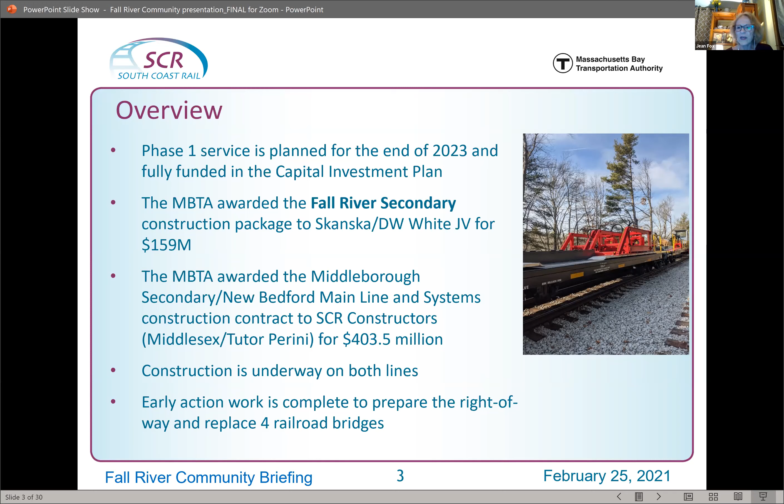Construction is underway on both lines and will be ramping up even more very shortly as we see spring approaching. We've done a lot of early action work in advance of this, which includes 46 culverts and a number of railroad bridges. We ordered special track. We've done some demolition, which you in Fall River also witnessed. So we've been very, very busy. Next slide, please.

So the stations and layovers are for Fall River. We have the Weaver's Cove layover, and we also have the station, the Fall River Depot. And then not far over the line is the Freetown station in Assonet. Weaver's Cove and the depot are 1.5 miles apart, and the Freetown station and the Fall River Depot station are 5.7 miles apart. So we're not talking a huge geographical area.

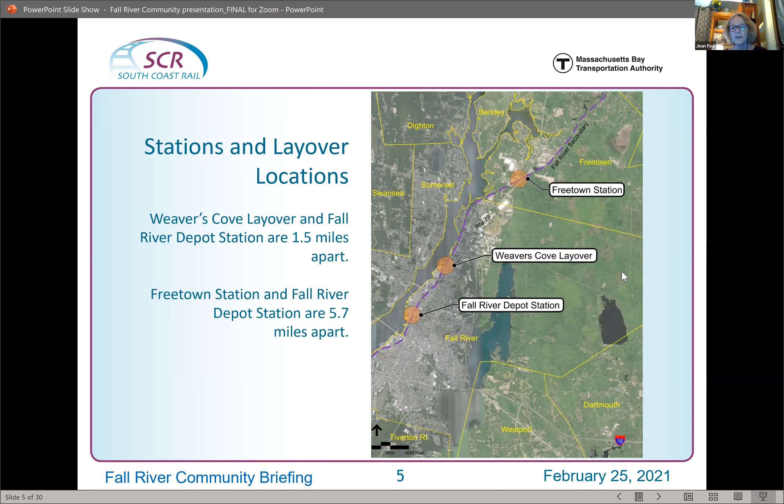Next slide, please. So in Fall River, the locations of these stations vis-a-vis everything else, you'll see we've got a number of bridges, including the Farm Road Bridge, Collins Street, Ashley, and Weaver's Cove layover there. And then at the bottom, Pearce Street Bridge and the Fall River Depot station. And then south of that, Turner Street Bridge.

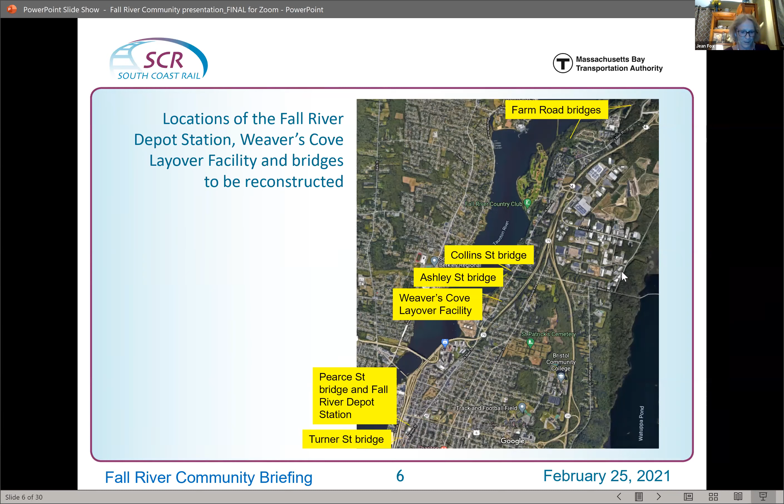Next slide, please. So what's included in this package? We have 12.1 miles of track, 2 new stations, the Freetown one and the Fall River Depot, and the layover facility at Weaver's Cove. We also have 10 grade crossings, but none in Fall River. We have 8 bridges and 10 culverts. Next slide, please.

So I'm going to pass it on to my colleague, Mike Fitzgerald, who's going to give you more details on construction startup. Good evening, thank you, Jean, for that nice introduction. My name is Mike Fitzgerald. I am the Deputy Program Manager for South Coast Rail. I'm going to give you an update on where we are with construction at this moment, and also where we're going to be going over the next few months.

Currently, we are doing survey work along the right-of-way. We've identified some encroachments on MBTA property, such as fences, landscaping, and some sheds. The abutters have been notified of those encroachments, and we've been working with them all along to remedy those. Recently, we sent out notices to the abutters to let them know of the active work going on along the right-of-way, which includes clearing and grubbing of plantings and trees.

We published those notifications in the local newspapers, Fall River and New Bedford, and also the Taunton Gazette. As always, our South Coast Rail team is available for questions and willing to go on site to make visits if abutters have questions or concerns. And like this meeting tonight, we regularly hold monthly meetings with the city department leaders to keep them apprised of what we're doing out in Fall River. Next slide, please.

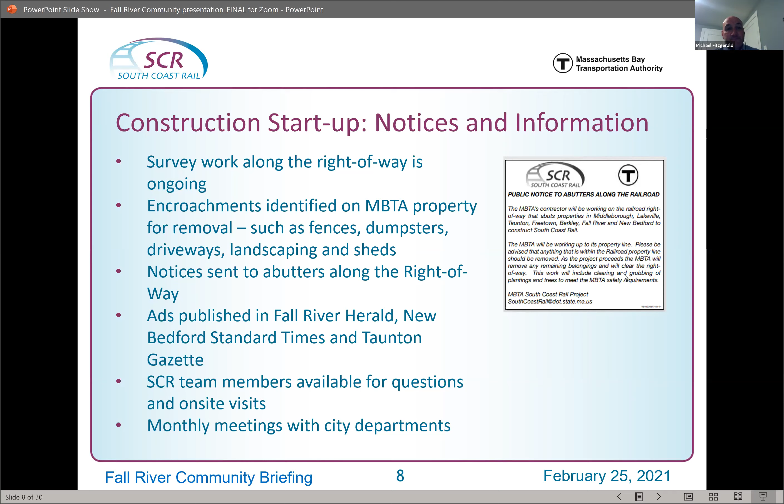I just want to give you a little update on what we're doing out there for construction. Our typical hours are 7 to 7. That'll start up actually next week with the sunlight. As we move towards spring, we get a little more daylight, and we're able to expand our hours to get this work done.

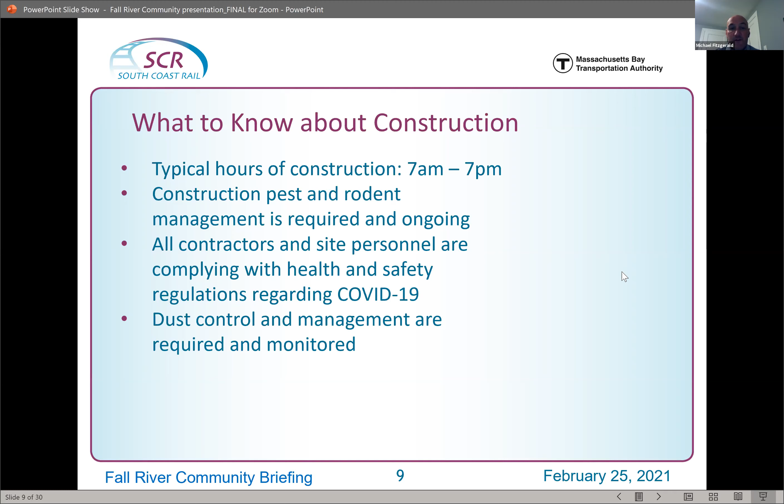Some of the work is construction and pest and rodent control, which is required and ongoing at multiple locations: the Fall River Depot station, Weaver's Cove, and also the Freetown station. Dust control and management are required, and our field staff and environmental inspectors consistently monitor that, making sure we and the contractor are following the requirements. Lastly, all of our contractors and site personnel are complying with health and safety regulations regarding COVID-19. Next slide, please.

This gives an idea of the work occurring, not shown on the screen, but to give you an update at Weaver's Cove, which is our layover facility in Fall River. We'll be doing earthwork, utility work, installation of water and sewer, and also some drainage piping. The pictures shown on this screen are at the Fall River Depot Station, where we're currently installing micropiles which will support the station foundation, located on the right-hand side. On the lower side is the building of a stormwater detention tank. Both of those locations are at the Fall River Depot Station. Next slide, please.

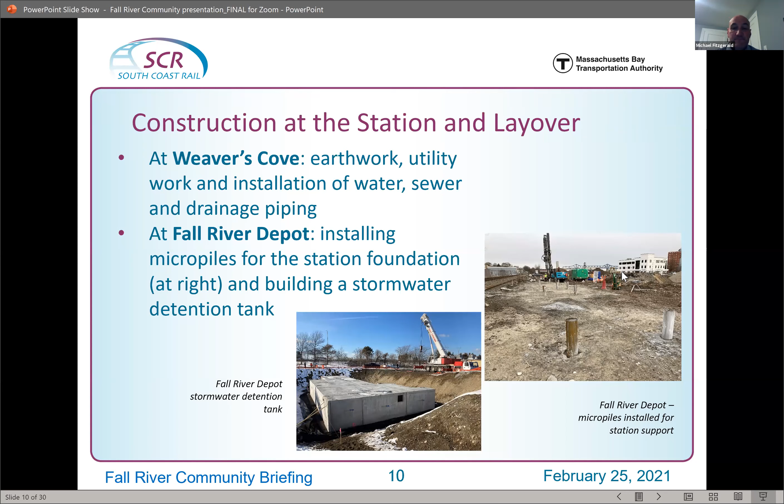Now, the next couple slides, I'm going to go through a few pictures. These are nice construction photos, so you can see the work that's ongoing.

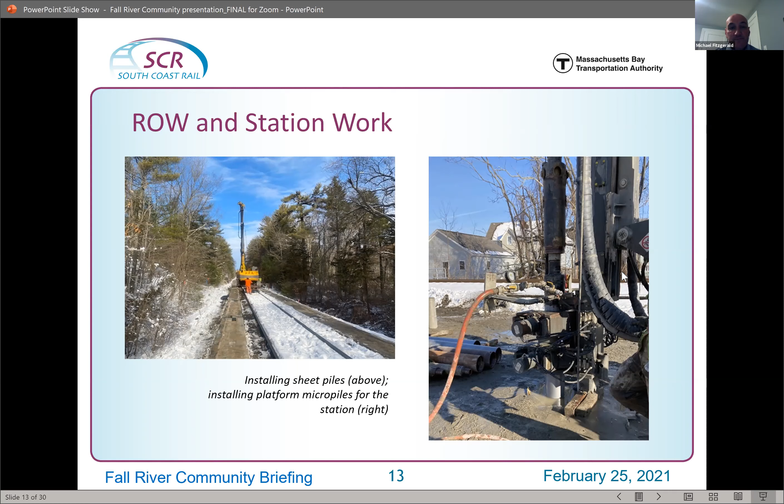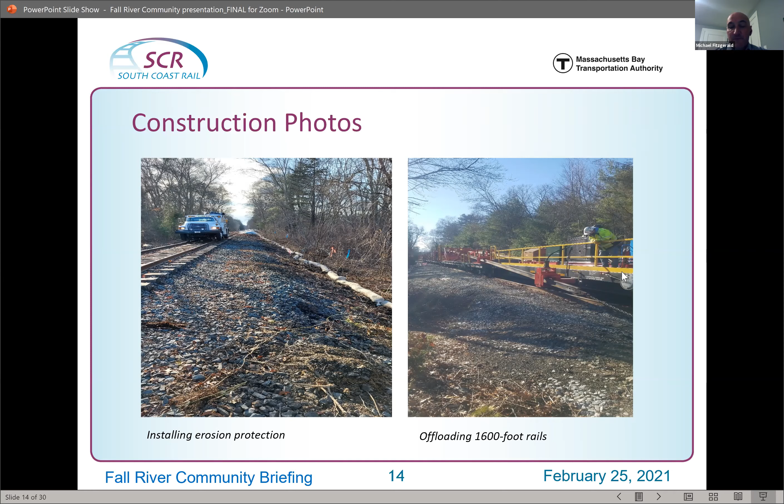I want to give you an update on traffic impacts you may see over the next year. Some short-term traffic impacts and lane shifts can be expected at Pearce Street around the Fall River Depot and Weaver's Cove location, and at the Farm Road Bridge, accessed via Horizon Way, where a culvert and bridge will be replaced. We'll also be doing reconstruction of the Pearce Street, Turner Street, and Collins Street bridges, which may require road closures and detours.

All of the above traffic management plans will be coordinated with the city prior to implementation. Also, you may see vehicles entering the right-of-way construction access at Terry Lane, and some short-term access at Cory Street and Alton Street.

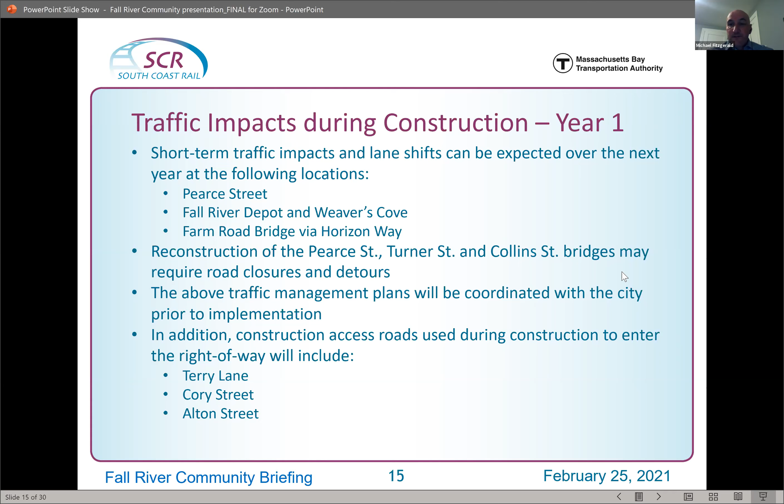So what's coming up in the next 2 months? Besides the work discussed, we'll be installing underground drainage structures, pipes and manholes, and relocating overhead power poles and lines at the Weaver's Cove Layover Facility. Down at Fall River Depot, we'll continue installing micropiles and pile caps for the station. Up at Freetown, we'll continue installing drill piles. Along the right-of-way, you'll see us constructing retaining walls adjacent to the track and installing sheet pile and drill piles, as well as continuing tree clearing, grubbing, and erosion control installation.

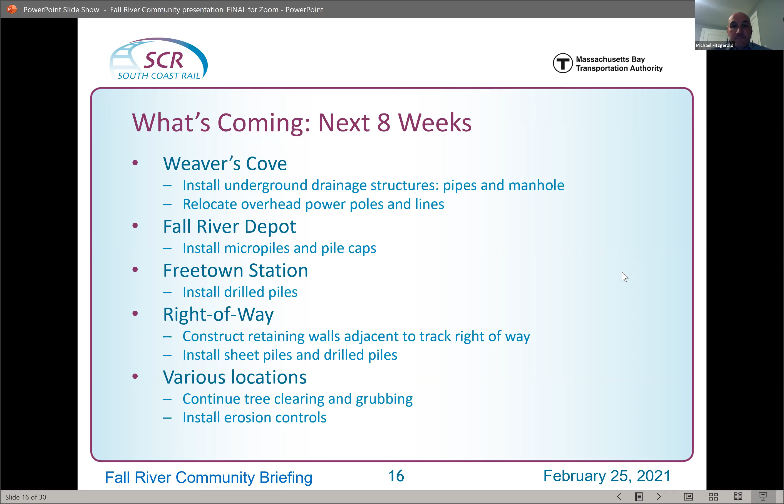I think I'm going to now turn it back over to Jean, and she'll continue the presentation from here.

Thanks, Mike. I wanted to give you a little more information on what you'll see at the depot station. It's located at Route 79 and Davol Street, right near where the old historic Fall River Station once lived.

It includes a 730-foot high-level side platform and 2 canopies, between Turner and Pearce. The high platform means you can get on or off the train from any car. It includes 220 vehicular parking places, 22 bicycle spaces, accessible parking, and electric vehicle charging spaces.

We also have a very clear accessible area for drop-off and pickup, and bus drop-off on North Main. It also features covered benches, fare validators, trash and recycling, and storage and utility areas.

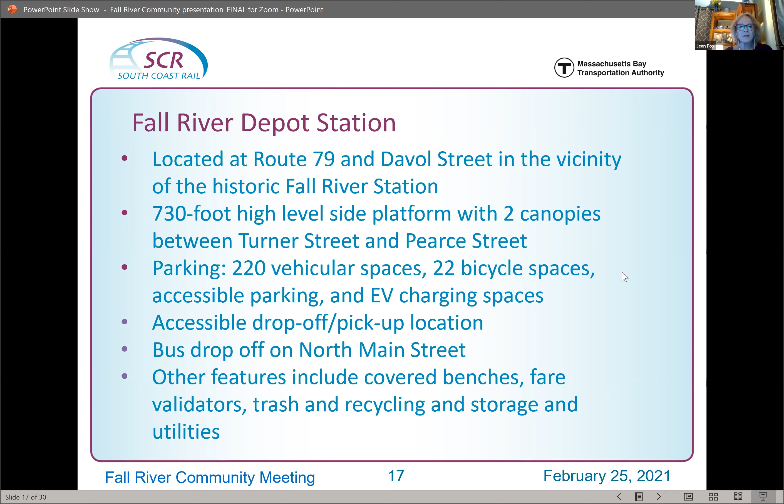The layover facility, which is where trains begin and end their day, consists of 6 sets of tracks. It has a crew building with crew parking and a secured area, so it's crew parking only, and it's right off North Main Street.

It's at 2680 North Main Street, that's its exact address. It's right next to the Fall River secondary line, but that's the main line serving the city of Fall River.

The trains will store there overnight between the last trip at the end of each night and the first trip the following day. What is conducted at a layover facility is cleaning, fueling, and light maintenance. No major maintenance is conducted at this area, and the trains do not run at night. In the wintertime, they'd be plugged in to stay warm. There are crew quarters and parking there, no neighborhood parking, and it is fenced and secured with a locked emergency exit.

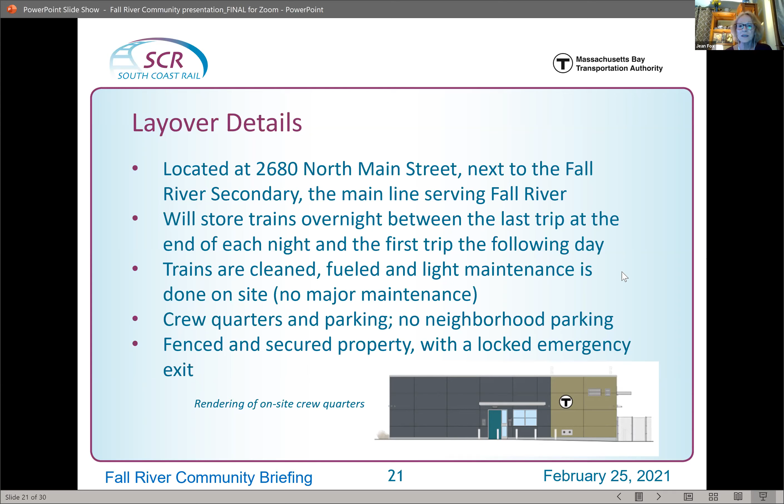So the diesel trains will start and end again at the layover. You will hear engine noise when they depart and arrive. We don't have any horns sounding there unless there happen to be people working on or near the tracks. While only light maintenance does occur here, you can hear some residual noise occasionally from these activities, even the fueling activity you may hear. That should not be very disruptive.

When trains do come in at the end of the day, we turn the engines off. In the cold months, the diesel engines do require warming, so they can get plugged into a 480kv power source to keep the engines warm so they can start up the next day flawlessly.

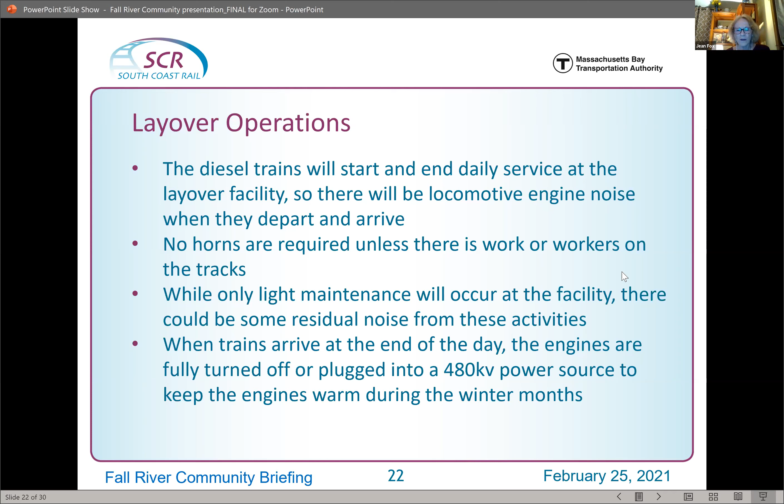I believe at this point, I'm calling on Mike Stiller to continue.

Thanks, Jean. I'm just going to talk a little bit about the environmental aspects of the construction at Weaver's Cove and Fall River Depot Station. I'm really focusing on some questions that have come in recently. So the first subject focuses on dust control.

Certainly the Weaver's Cove site is a very large site, there's a lot of earthwork going on, so we recognize the importance of dust control for the program at that site. Also, Fall River Depot Station is now undergoing quite a bit of earthwork for anybody that's been by there. Dust control at that site similarly is very important, and we focus a lot on it.

There's a few techniques shown there in the top 3 bullets that we use to control dust, whether it's water trucks or stabilizer, hydroseed, compacting, smooth rolling earthwork surfaces. Certainly water trucks, we try not to use those in below freezing conditions because they create a problem as opposed to solve a problem. But there's a number of techniques that we use.

Similarly, we have perimeter erosion controls established around both the layover facility site and the station site, as well as the work that we're doing within the right-of-way. A variety of different techniques and mechanisms are used depending on the location, whether it's silt fences or hay bales or compost filter tubes or combinations thereof.

We have tracking pads at the site exits to further limit truck tire tracking of mud onto the roadways. Certainly during the recent weather, sometimes that's challenging. So we do have street sweeping on North Main Street to clean up anything that does unfortunately get out onto the roadway. We make every effort to make sure it doesn't get out onto the roadways, but sometimes it does, and we make it a strong effort to clean that up quickly when it does.

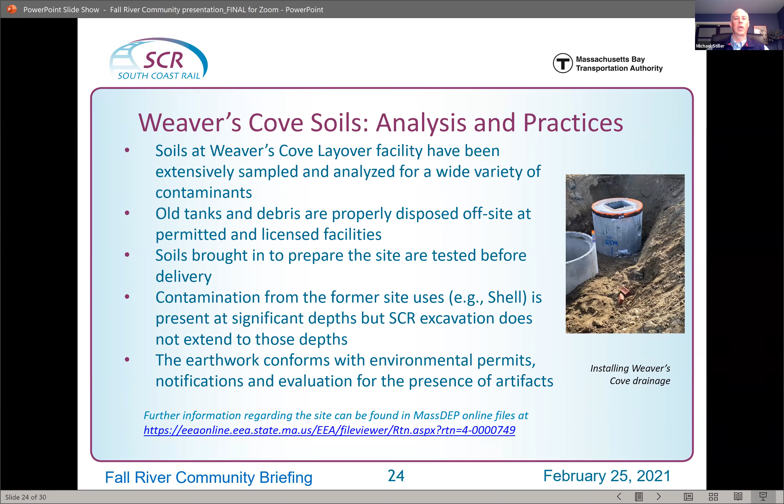Thanks, Mike. I'm Bob Campbell, Director of Design Administration for South Coast Rail. Along with the two major construction contracts going on right now, we still have some work that's under design, which is off-site traffic mitigation.

As I said, they're under design now. We're coordinating with the city on what the improvements will be. They'll go out to bid by the end of 2021 and be constructed in 2022. The two locations for off-site mitigation are President Ave at North Main Street, where we'll add left turn lanes on North Main Street, a new traffic signal system, new sidewalks, and ADA compliant curb ramps. We'll also do similar work at President Ave at North Davol Street, where there'll be new pedestrian signals, new sidewalks, ADA compliant curb ramps, and improved timing for pedestrian crossings.

Now, one of the things I'm sure a lot of people in Fall River are anxiously looking forward to is the Route 79 project. During our design process, we will be coordinating with the MassDOT team doing the Route 79 design projects. Depending on how things shake out, we might not end up doing the President Ave North to Wall Street part of the work, because it may be incorporated into the Route 79 project. We don't want to put something brand new there and then have it be obsolete and ripped out immediately thereafter. So during our design, we'll continue to coordinate and see how much of that work north of Wall Street ends up being done by South Coast Rail.

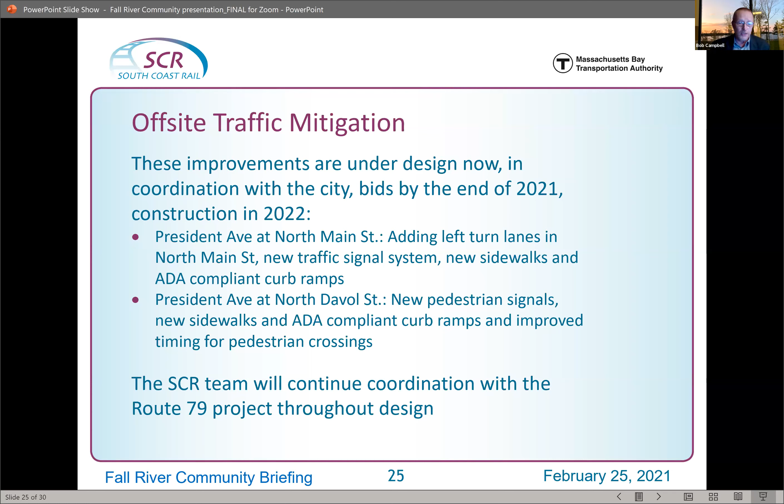I'm going to turn this back over to Jean Fox for the next slide.

Thank you. This is our phase 1 construction schedule schematic. It's very colorful. It shows that we've acquired the properties we need. We've done a lot of early action projects, as I mentioned earlier, the demo contract among them, and the special track work, which we're just about done receiving delivery of. You can see the Fall River secondary contract is scheduled right now to be complete by the end of calendar year '22. The New Bedford contract does incorporate all of the signals, including positive train control, all the dispatch, and all the signal work.

So they'll be coming back in. You're not off the hook, Fall River. You're going to be seeing additional activity then, but the lion's share of the construction will be behind you. Our service goal is late 2023.

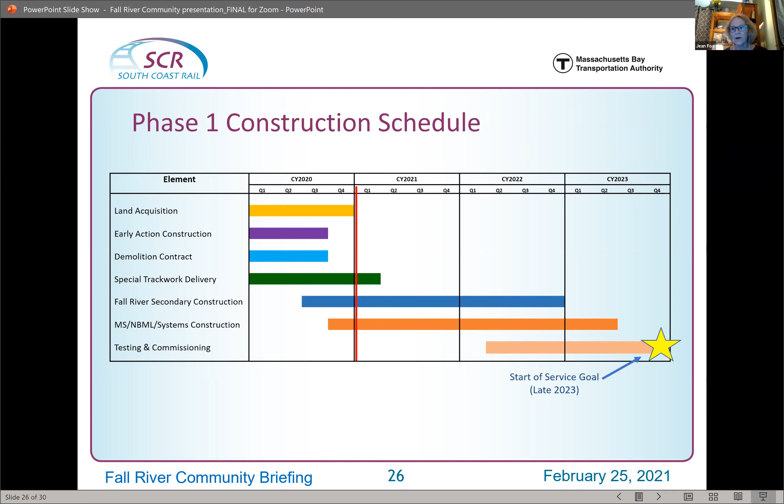Please sign up for the weekly construction updates. We try to keep them succinct. They spell out where work is going to be happening, the days and times work will be happening, and give you our contact information if needed. It's basically a weekly, usually Tuesday to Wednesday, update on everything going on with the project. As I mentioned, we anticipate a lot of activity—you heard from Mike Fitzgerald that the next two months will see a great deal of activity. So these updates you'll find very helpful.

You can sign up at mass.gov/SouthCoastRail or mbta.com/project SouthCoastRail. But I'll tell you what, just Google South Coast Rail and you'll land there.

To report a construction related issue on the South Coast Rail project, we have a hotline. That number is 774-762-7000. I'm going to add a little wrinkle—that number will be changing on Monday. If you're signed up for the e-blasts, you'll know about it, but we'll also post it prominently on the website so you'll know exactly what the new number is. It's a 222 number, a classic T MBTA exchange, and it will be for all of the contracts, covering you folks in the Fall River area, as well as New Bedford and Middleborough.

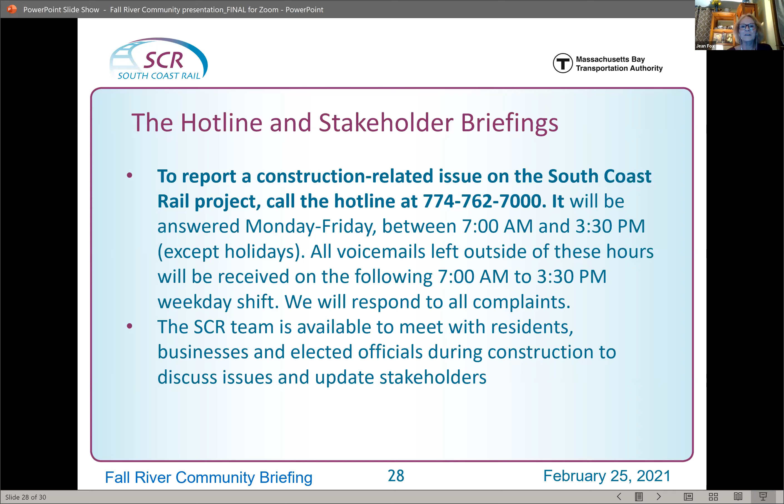So, how to follow us: do visit the project website. We update it regularly, and there's so much going on that you can count on it being updated regularly. That's at mass.gov/SouthCoastRail.

Do continue to participate in these virtual meetings. We're having them in a number of communities, and it doesn't mean it's a one and done. We're happy to come back whenever you folks feel there's a need, whenever anyone feels it's time for an update, or when we feel there's a lot going on—we want to see if Fall River wants to hear from us again. We're happy to do that.

Any comments you have, please feel free to reach out to South Coast Rail at construction.state.ma.us. And again, that construction hotline number is great for a couple more days, 774-762-7000, but we will update you as soon as we can with the new number once it's live.

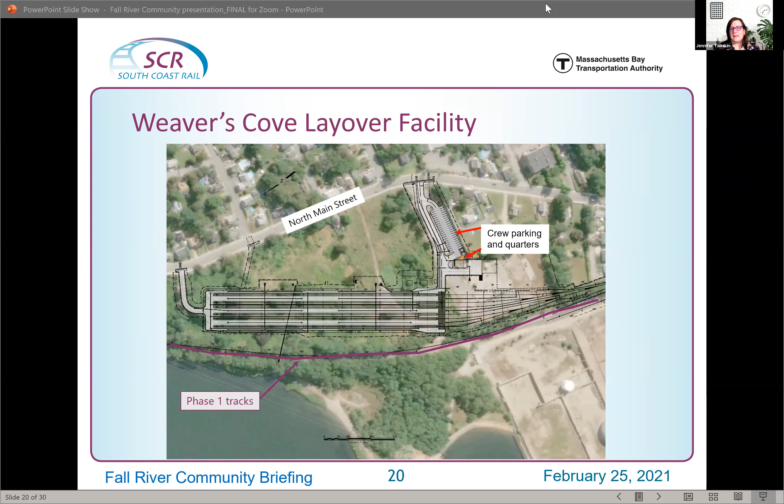Thank you very much. We have another question from Brian about, are all parking spaces surface parking? Will footings be installed so that if demand exceeds the supply of parking spaces, a deck could be added? And I think, Jennifer, you were going to answer this question. Yes, I'm going to take that question because I understand there's been a lot of questions about parking in the area. So the existing parking lot that we're designing to be adjacent to the station is surface level, and we aren't putting any foundation in for a second level.

However, I know that there's been questions about that. Could it actually be done? And yes, nothing precludes that in the future, if there's interest in having an additional level or a parking garage structure over that parcel, that is technically able to be done. But our plan for South Coast Rail is the surface level parking lot, and we need to make sure that those spaces are dedicated to the riders who are going to be riding the train.

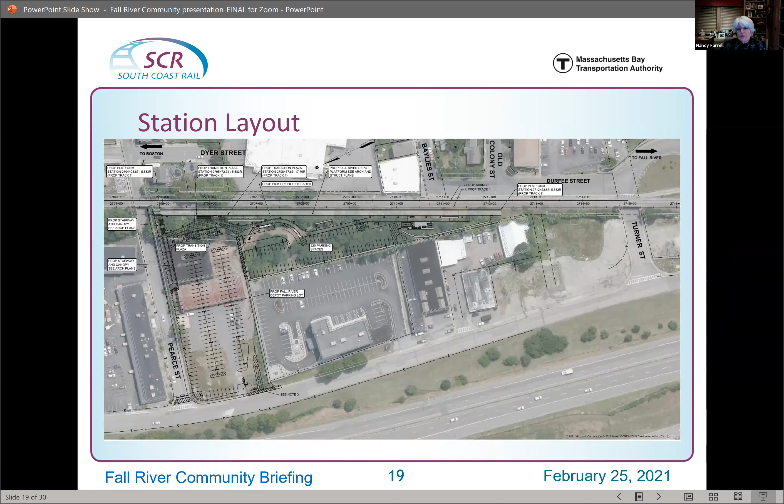Thanks, Jennifer. We have another question about where retaining walls are being constructed. Are they near homes abutting the tracks? Now, Mike, I think there's a difference between retaining walls and other kinds of walls, so perhaps you can talk to us about that.

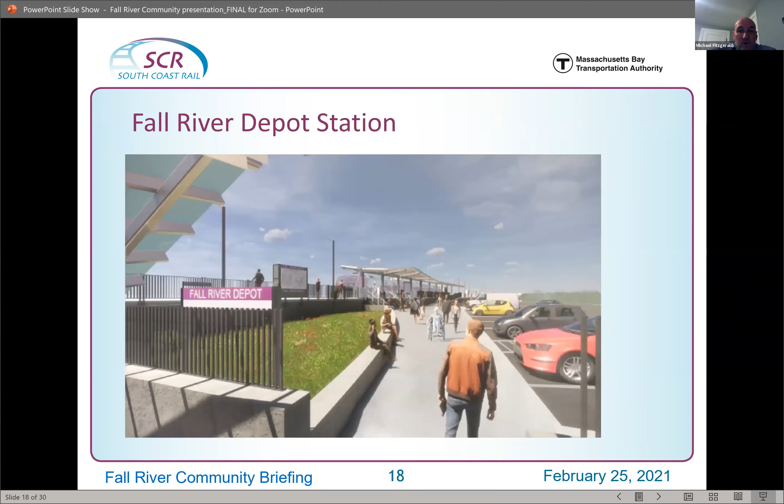It's not a great distance away from the track itself, the center line of the track. And so that's used to help retain any of the soil that's going to be surrounding, and the ballast that's going to be surrounding the track. So certainly there will be some locations as we're going by homes that these retaining walls will be going in. I don't know the exact height or anything like that.

I'm sure if Ken, if you've got some additional information as far as what the retaining walls that Diane may be referring to or asking about. Yeah, they're in various locations up and down the Fall River Secondary. There are retaining walls like this going in Fall River, over by the Taunton River, as an example, just north of Weaver's Cove and south of the golf course.

That's one example. When we get into the urban centers, we use a slightly different style of wall. It's a soldier pile, I-beam, with precast concrete lagging instead of the steel sheets. So various types. Heights are not that high. Most of the walls along the corridor are probably 6 feet or less. Very few walls are very high. It's just to hold the shoulder for track operation safety adjacent to the track and to avoid wetland impacts in the design.

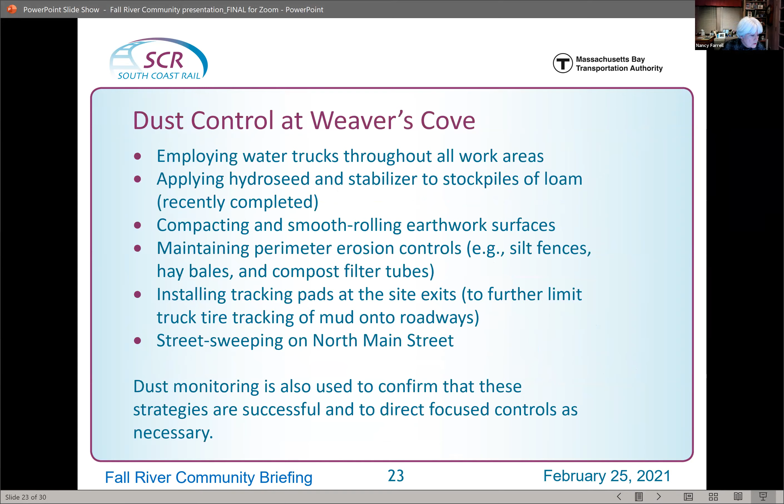Maybe, Diane, you could write and say a little bit more in that question. Or maybe Diane could also just write to us and we can pull up graphics for her. Absolutely.

And I see Dana Hanson from Congressman Auchincloss's office was on the phone with the congressman when we unmuted her. So Emily, maybe you could unmute Dana Hanson and she can say hello. Hi, Dana. Can you hear us? Dana? All right, well, come back. Yeah, okay, great. We have another question about, she's just raised her hand, I think. Emily, can you try again?

I am here. Oh, hi, Dana. Hi. Oh, you can't hear me. I'm so sorry, everybody. My name is Dana Hanson. I work for Congressman Auchincloss. I was actually on the beginning of the call, and then he called me from DC. And when your congressman calls, you answer.

Anyways, I was actually filling him in on the project, and I was briefing him on a terrific call I had last night for the Viva Fall River project as well. I think these projects, both between South Coast Rail and the wonderful work being done in Fall River right now, I echo Mayor Coogan and Rep. Viola's enthusiasm for this project. This is a wonderful project, and Congressman Auchincloss is here to support and help convene stakeholders. Please count us in the mix on this wonderful project. We appreciate it. Thanks, Dana.

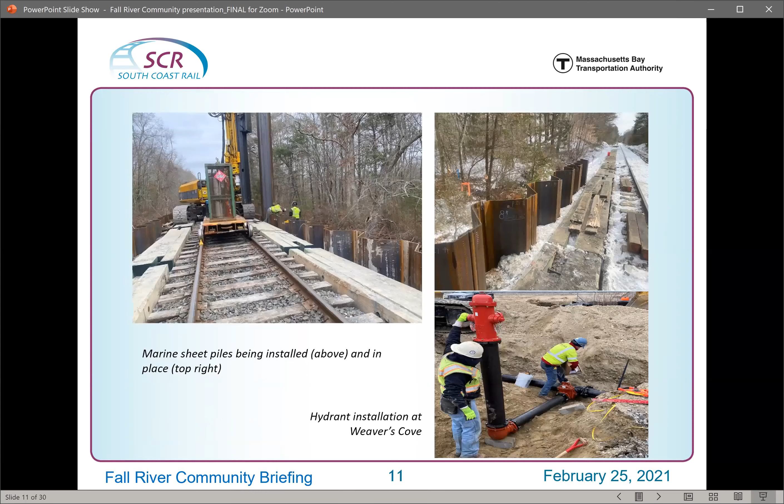How long do you think it would take if you got on a train in Fall River to South Station? How long a ride is that in terms of time? It's about 90 minutes.

I get your weekly updates. Oh, good, good, good. And if you go to our website, there are many maps, so you're also welcome to do that, you'll learn more. I'm hoping to be a distinguished guest at your dedication, since I'm about 80 years old. We would welcome that with open arms. I'm going to write to you, Jean. I'm willing to listen, and I always like to respond. I know what reporters are like, and reporters will be looking that day for some old person who used to ride the trains. Good plan. Thank you. Appreciate it.

We have a couple more questions, and this is a good one. What is a micropile? Mike, can you tell us what a micropile is? I can, but you're probably better off asking Ken. It's a drilled shaft that then would support the foundation of the station platform itself. But Ken, if you would give a little greater detail than I. I thought that was an excellent explanation.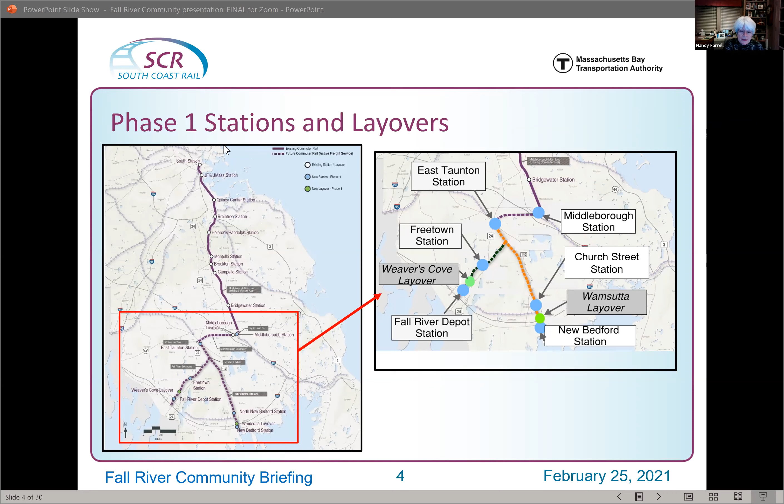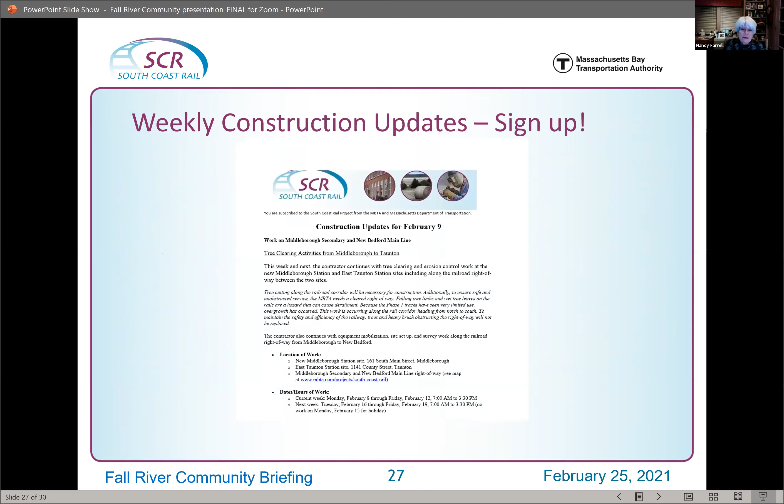Mark apologizes for missing the beginning and asks if they discussed the projected fares. We didn't, and we won't at this point. The MBTA is doing a whole fare study and will have a completely new system, so as we get closer to the opening of service, that information will be available. Right now it's not part of our project responsibility.

As for the question about how you get your dump truck in the project, you could send us an email and we would share that information with you on how to reach the contractors.